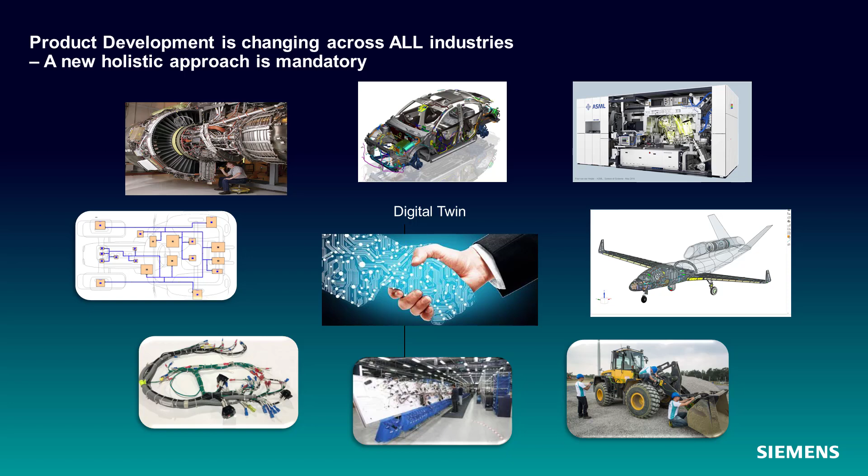So, to realize that digital twin, it's imperative that we diminish those boundaries between these different disciplines, between mechanical, electronic, electrical, network, software, simulation, all of these different environments we have. We have walls right now that impede successful productivity and innovation. So, correctly executed on, we can remove those interdependencies, we can understand the handoffs between those domains, we can establish traceability between these domains, and we can flow the data between and actually get to a product in the end that we can certify and know it did what it's supposed to do.

So the Xcelerator portfolio provides this best-in-class set of tools and methods for defining that digital twin, taking it all the way from a concept through design, through integration and manufacturing of the end product. And Capital is the suite of tools that provides the EE systems environment portion of the Xcelerator portfolio. It's integrated into the overall Xcelerator environment to provide a broad solution to our customers.

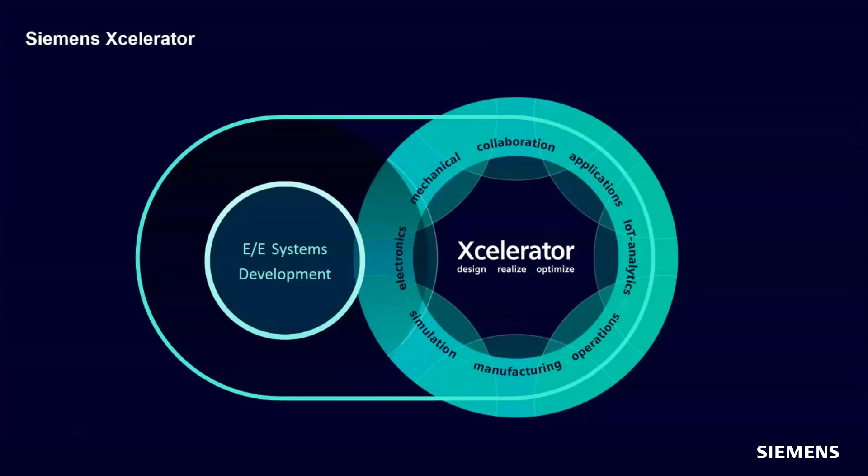And then following the entry of those products into service, customers need to be able to efficiently service, diagnose, and repair electrical systems, and Capital provides solutions that make that process more efficient than is typically possible without advanced tools.

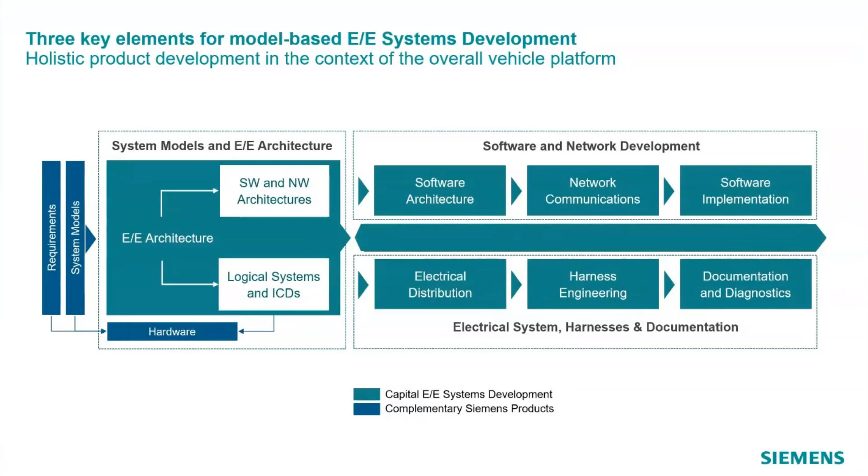So Capital itself is a data-centric system built on data and process backbones that enable extremely high levels of automation, data coherency, and integration with the adjacent domains. And this EE data management system enables traceability, change management, configuration management, and it is an environment that our customers have demanded and that we've built up over a number of years to satisfy those demands. But the EE systems are a part of the wider program lifecycle within organizations, and we do provide deep integrations into PLM systems and other necessary domains throughout the product development process.

So with that exploding complexity of the EE systems, development happens in the context of this model-based engineering. And that's what Capital is all about: model-based engineering, not just model-based systems engineering, model-based throughout the design process. So to deliver this whole integrated system, we integrate with other domains to really deliver that integrated system development environment into MCAD, PLM, and ALM systems. And in today's session, we'll take a deeper look at three of those key integrations from Capital into the overall Xcelerator solution.

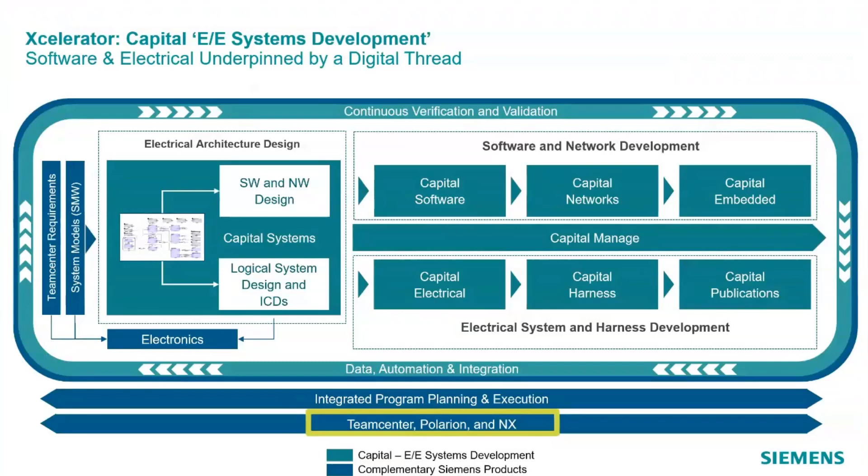So let's start with Teamcenter and how this integration enables the EE data to be integrated into the overall product structure. So EE design is just one aspect of that overall product design. In the context of the Xcelerator portfolio, it must integrate seamlessly into that overall product structure that's held in Teamcenter. And Siemens open architecture enables this integration, allows the data needed by all of those engineering disciplines to be mastered in Teamcenter, consistently used across all areas needing it, and ensures that the products designed and implemented are based on a common understanding of the requirements, the features, the variability and configuration of the larger context, as well as providing an overall status of the various pieces that make up that product.

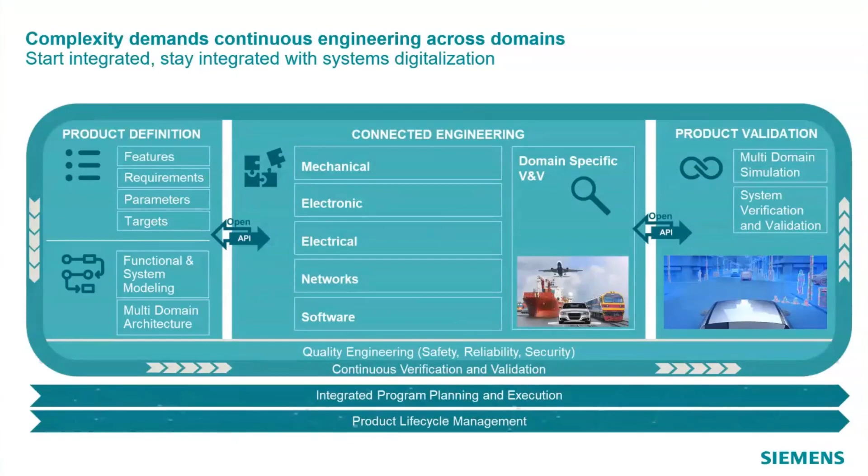So as I said before in introducing Capital, Capital itself has a rich set of data management process control capabilities, and it allows us to be deployed into customers not using other PLM systems or not connecting EE to their existing PLM. But when we're in the context of a Teamcenter environment and a customer that's using Teamcenter, Teamcenter takes control over many of those life cycle responsibilities, and Capital kind of pulls back and is used to concentrate on providing that EE design environment at which it excels.

So in such a setup, Teamcenter is responsible for the life cycle and approval process of both the components, parts used in the EE designs, as well as the designs themselves. The release and approval process is implemented via standard workflows in Teamcenter to ensure consistency with the overall product development lifecycle. And Teamcenter also holds information that's relevant to multiple design disciplines, and Capital will merely use that data to drive the EE design and ensure we have consistency across the domains.

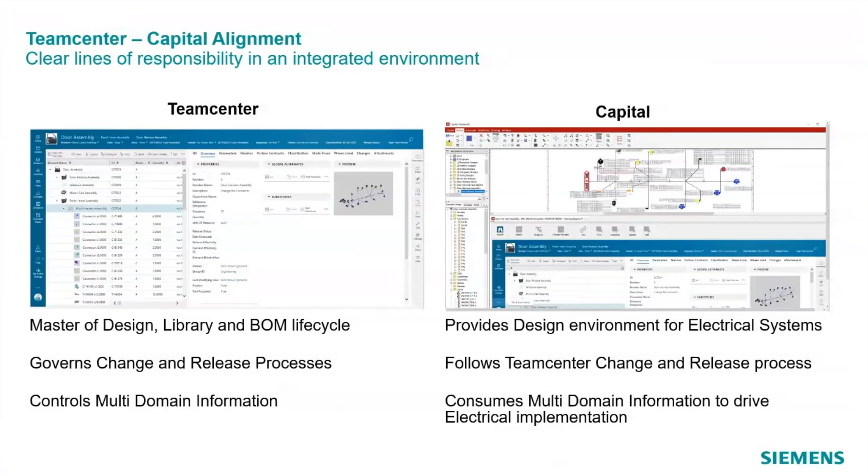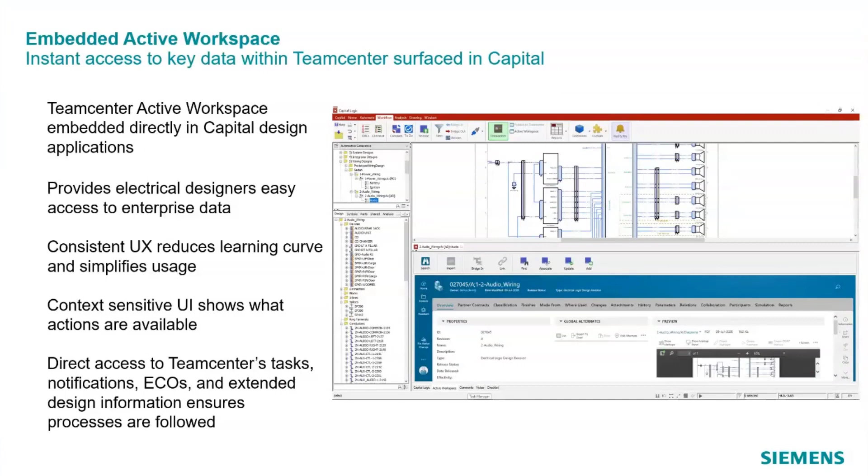So one of the key aspects of Capital's integration into Teamcenter is the use of Active Workspace embedded directly in the design applications to provide direct in-tool access to the overall product information and to the data published to Teamcenter, not just by Capital, but by other domains working on the design of the overall platform. So Capital is able to add integration and application-specific icons directly in the Active Workspace frame in order to provide context-sensitive access to the integration features. And we'll see how these are used later in the presentation to provide a seamless integration experience.

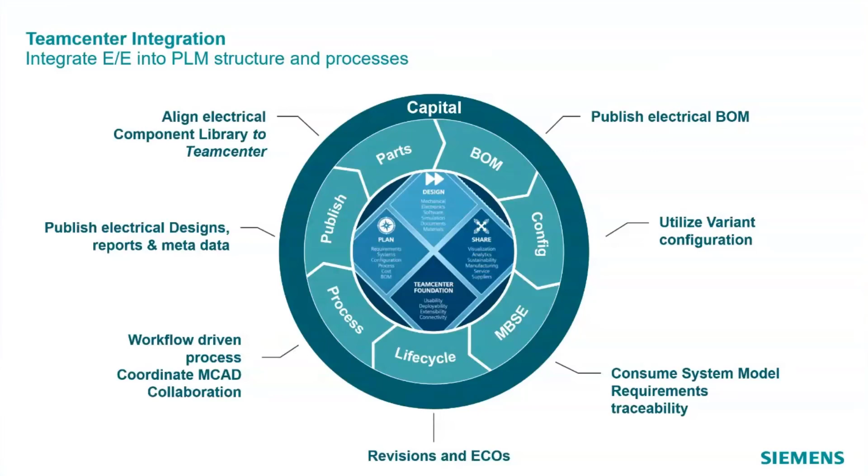So let's start at the beginning of the product development process with a definition of models representing system behavior. So in order to provide an initial electrical systems design, we have the ability to take a managed System Modeling Workbench design from Teamcenter and directly read that into Capital Systems at the front end, left side of that flow. And this really allows customers to reuse their functional or system definition from a systems model in the initial EE design. And then that initial design includes all of the relevant system elements, connections, and associations to Teamcenter requirements for the EE engineer to design their system.

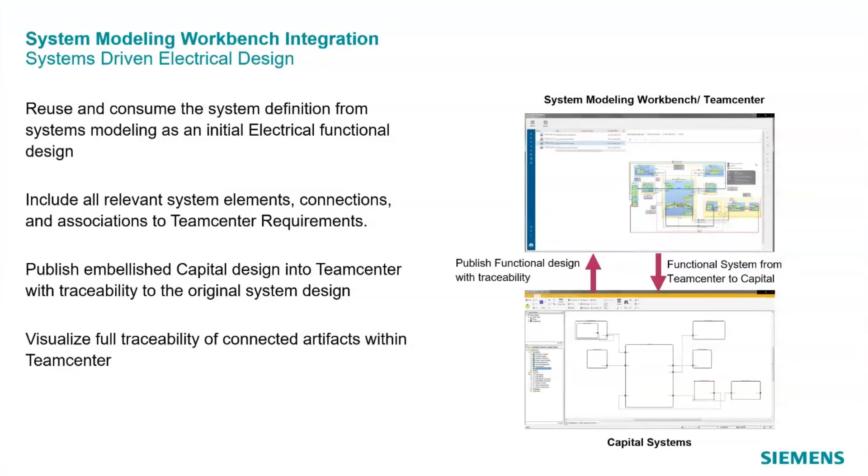And then once complete, that EE engineer can publish the refined Capital design to Teamcenter and also capture that traceability to the original system and system design. So this allows anyone in Teamcenter to visualize the full traceability of all of those connected artifacts. So System Modeling Workbench is that first integration.

And then if you move on, the next piece of this would be managing the association of the requirements in Teamcenter with the relevant objects implementing those requirements in Capital. In the case of the System Modeling Workbench, any requirements associated to the System Modeling Workbench objects are automatically carried forward and linked to the resulting objects in Capital. However, even without using the System Modeling Workbench, users in Capital are able to use the embedded Active Workspace to navigate to the relevant Teamcenter requirements and establish links between the two. And a little later, we'll take a look at what that looks like, but actually in the context of Polarion.

But from within the Teamcenter environment, even when you're not connected to Capital, a user can select the linked objects and bring up a web-based view of the Capital data and highlight exactly where those requirements are linked. So you can come through Teamcenter and understand the full breadth of the objects that are implementing those requirements. And then those associations can be used to validate that all of the requirements associated with their EE implementation have been fulfilled.

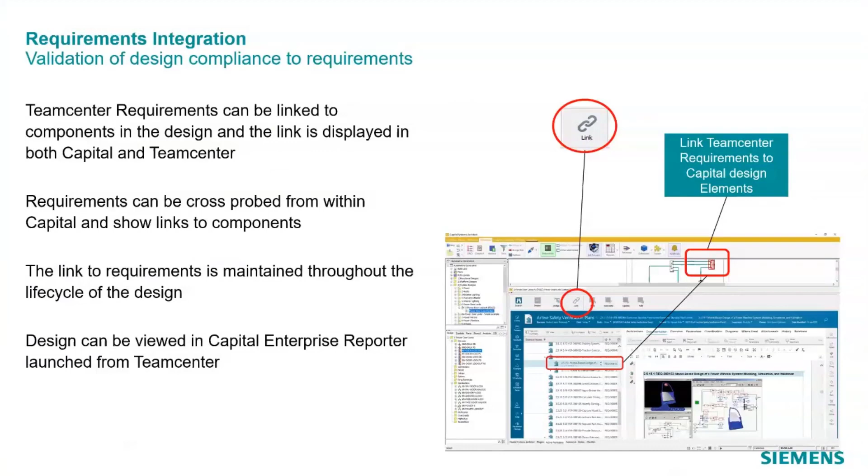Another area where Teamcenter holds the overall product information that's needed in the electrical design process is in the area of configurability. Teamcenter's Product Configurator is used to define the optional content in the platform, as well as the relationships between those options, such as inclusive or exclusive relationships. So for example, a mandatory and exclusive relationship between the engines could be available. There are multiple choices for an engine, but you can only have one, and you must have one in your car.

So the integration of Product Configurator allows these options and their relationships to be mastered in Teamcenter and used to populate the Capital version of that model into the product plan in Capital. And then that data can be used to calculate the optimal set of configurations needed to cover all the electrical and mechanical variations. And then using the powerful automation features in Capital, we arrive at an optimal set of manufacturable harness parts.

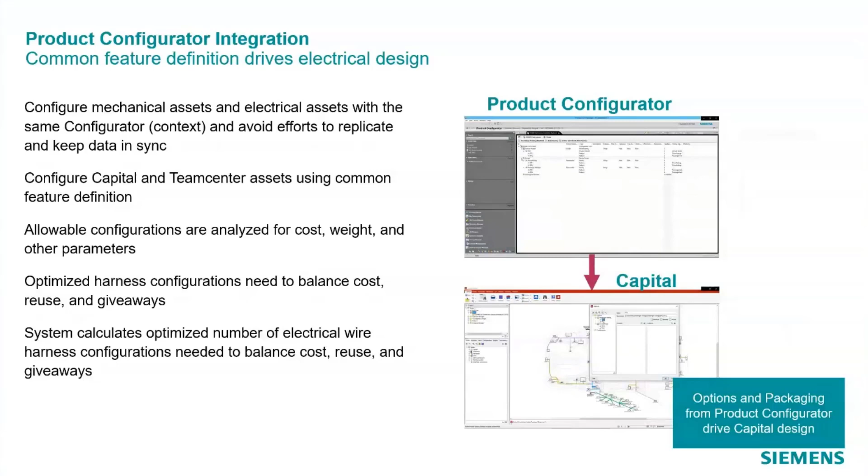So the next area of this integration that we'll highlight is component libraries. So although Capital has a robust environment for entering component data with all relevant electrical information to drive the electrical design process and automation, the identity of a component across all applications using Teamcenter, as well as the life cycle of that component, is owned by Teamcenter.

And so therefore the challenge is to ensure that Capital uses the same identity for the component as Teamcenter, so it can be correctly represented and included in the bill of materials. So to achieve this, there are both interactive and automated ways to establish that link. The interactive association and synchronization is achieved by embedding the Active Workspace into our Capital library application.

And that gives the librarians in Capital the ability to navigate to the relevant components in Teamcenter, either to initially establish the relationship or to update the Capital component attributes based on the latest data held in Teamcenter. And the use of the Active Workspace here also allows those Capital librarians to see all other aspects of that part held in Teamcenter, not just the electrical aspects of it.

But to ensure those libraries are always in sync without manual intervention, the EDA library capability in Teamcenter is used to extract the updated components and automatically send them to Capital. And so the schedule for that integration is defined on the Capital side using our Capital Enterprise Assets application, and it initiates the pull of the latest component information from Teamcenter and manages the merging of that data into the Capital library itself.

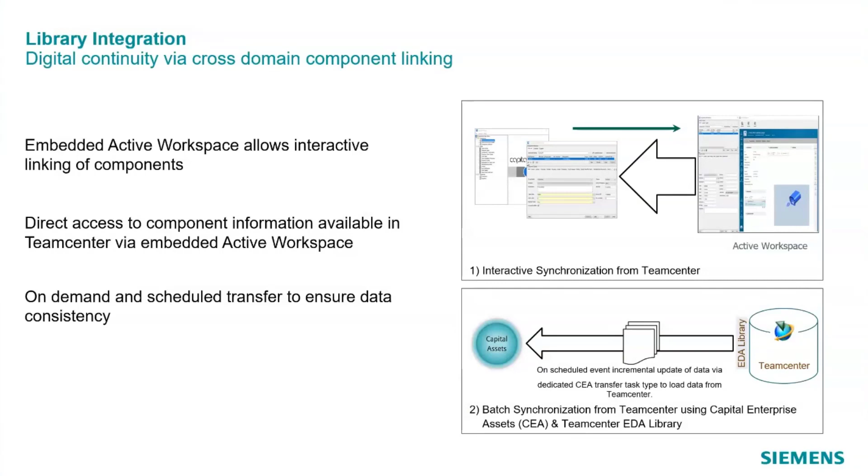So with those links established to the component library and the Capital data model populated with the relevant cross-domain information, electrical designers can use the powerful automation and electrical design features in Capital to complete the designs and publish those results back into Teamcenter. And there are a set of standard item and dataset types for electrical that are shipped with Teamcenter that customers can quickly configure.

The default configuration in Capital uses those item and dataset types when we publish to Teamcenter. And this is what we use for Teamcenter X deployment: out-of-the-box dataset types defined in Teamcenter. Out of the box, Capital ships with those same data types. So for a new customer, it's all good. However, many customers already have these item types and dataset types defined and in use. So we provide the ability to configure the integration to publish to any design type in Teamcenter as required. And that configurability is key to enabling the Capital integration into any new or existing customer setup.

So by default, Capital will publish a zip file of design XML representing the design for archival purposes, as well as a graphical representation, PDF by default. Others are supported. However, customers can configure that integration to publish any report available within Capital, as well as having full plug-in capabilities to allow any type of data to be published along with the design itself.

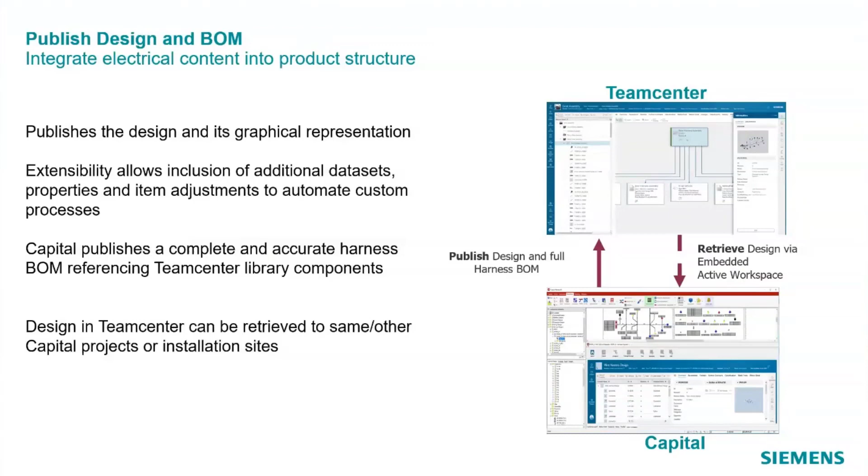So now let's move on and talk about the life cycle of Capital designs and how they can be controlled via what we call the Teamcenter driven design process. So in this flow, the creation and revisioning of electrical designs is initiated from Teamcenter to establish the existence and identity of an electrical design.

So from within the embedded Active Workspace in a Capital design application, the engineer can navigate to an item in Teamcenter and create the Capital design that will implement that item and the required electrical connectivity, and eventually then publish the results of that design activity back to Teamcenter, as we talked about in the previous slide. So this context-sensitive integration is achieved with additional Capital capabilities added to the embedded Active Workspace.

And this allows users to create new designs in Capital from existing Teamcenter items, or associate an existing Capital design to an existing Teamcenter item. And then after that association is made, push any attribute changes from Teamcenter back onto the Capital design. So this is a process favored by many of our customers to ensure that their electrical designs are fully integrated into that overall product and really drive everything from Teamcenter.

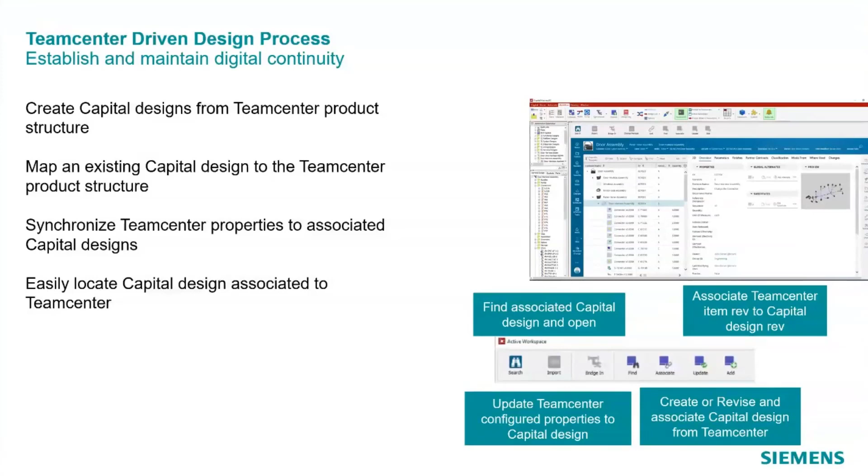Carrying on with the theme of Teamcenter managing the life cycle of Capital designs, the integration also supports the use of workflows in Teamcenter. Currently there are two types of electrical workflows available, shipped directly with Teamcenter. The electrical design review workflow allows a Teamcenter user to progress a Capital design through an approval process, ensuring the design in Capital follows the Teamcenter states to keep the release level in sync with changes made in Teamcenter. That workflow also supports rejecting the approval and moving the design back to in-work status so issues can be fixed, then republished and resubmitted.

The second workflow is the electrical design revise workflow, usually used for change management. It allows a Teamcenter user to create a revision of the capital design ready for either new functionality or a defect fix. The capital user simply opens the target revision after the workflow is completed and starts work. But to enforce process, Capital has the ability to set a preference that forces all design creation and revisioning to be driven through Teamcenter.

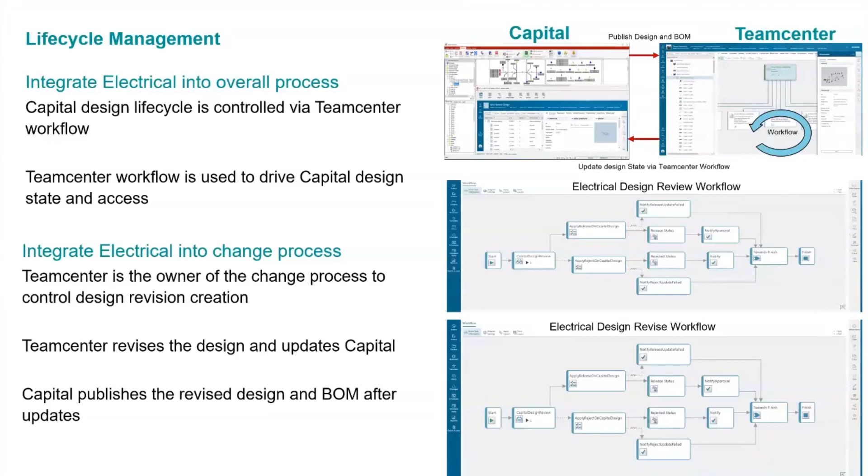As a final piece of the Capital-Teamcenter integration, Teamcenter can be used to mediate the exchange of data between Capital and NX. Instead of using uncontrolled methods of file exchange like the operating system or email, the data can go directly into Teamcenter, where either application can access it in a configuration-controlled way, ensuring the right files are used from the right revisions on both sides. So when Capital is connected to Teamcenter and data is bridged out, it'll automatically be placed into Teamcenter instead of the file system, under the item we're publishing.

And in the embedded active workspace, you can navigate and bring data from NX directly back into Capital. So hopefully you've seen here how the Capital integration with Teamcenter has many touch points to enable that digital thread to be created, maintained, and leveraged to integrate the electrical data into the overall product structure.

At this point, I'd like to hand the presentation over to Tanya, and she'll take us through the NX related integrations.

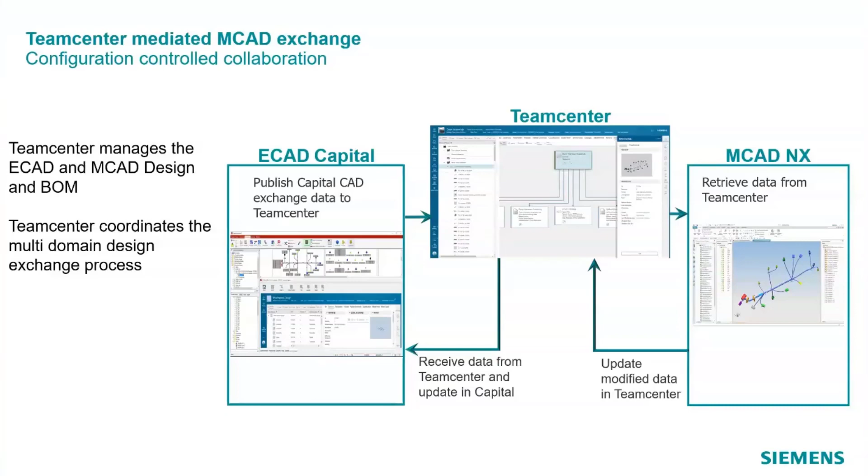Thank you, Glenn. Moving on now to the topic of integrating electrical and mechanical design processes. Let's discuss how NX Capital integration strengthens the Xcelerator offering around electrical design. Just as there are benefits to integrating electrical data into Teamcenter, there are also benefits to breaking down the silos between mechanical and electrical design. As shown in the results of an engineering.com research report, 72% of teams say an integrated electrical and mechanical design environment can significantly reduce product delivery time.

Why is that? In many companies today, electrical and mechanical design teams work separately, and therefore the integration is done late in the design process. This results in either rework to the physical structure of the platform, which can be very costly, or more likely a suboptimal integration of the wiring, resulting in some electrical characteristics not being accounted for in the initial design. In either case, there is an impact to schedule and quality. So it is essential to

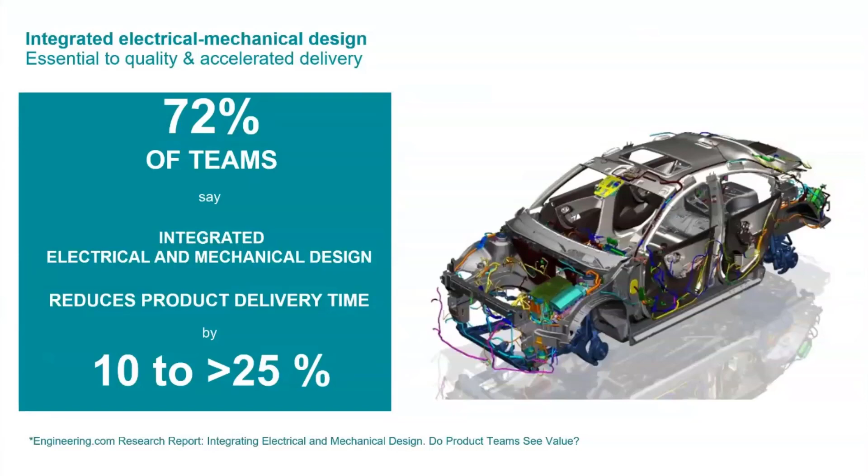obtain seamless integration, enabling ECAD-MCAD co-design across the Xcelerator portfolio. In most design flows, engineers are typically working concurrently on designing the physical harnesses in NX, while electrical connectivity is being defined and designed within Capital. So NX is responsible for defining the physical geometry of the harness, the fixtures and fittings, and ensuring there is sufficient space in the vehicle for the harness to be routed and fitted. Whereas Capital is responsible for mastering the electrical connectivity and fully defining the harness as an electromechanical product. The NX and Capital electrical data are then combined to make manufacturable harnesses, so the collaboration between these two tools is key to enabling precise concurrent design.

Capital Tools has many touch points with NX across all domains, like Capital Logic, Topology and Integrator, and Harness XC or Modular XC. Capital provides a robust and flexible set of integration capabilities to enable the digital thread to be created, maintained, and leveraged to integrate electrical data. With Capital Logic, we have the ability to send wires to NX and have them routed and wired back. In the topological tools, we can import the bundle topology and have routed or synthesized wiring, then calculate bundle diameters and splice positions and return them back to NX.

Finally, with Capital Harness XC and Modular XC, we can pull the full mechanical description of the harness parts, including bundle protections and supports, and have the wiring synchronized, then calculate bundle diameters and splice positions and return them back to NX. This process also eliminates the need to have any wiring in the MCAD tool, if desired. This separation of data means an NX harness won't need to be modified and rechecked whenever low-level electrical changes happen, which reduces the overall number of design change approvals needed to implement a change and improves the overall design time.

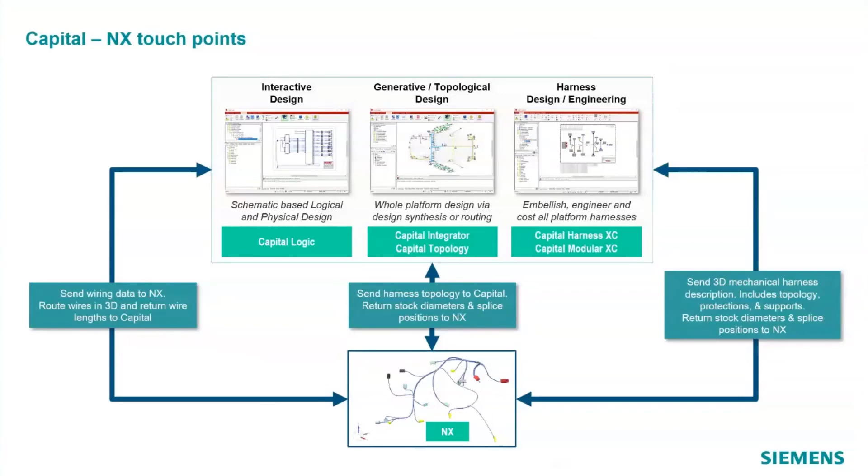All these integration capabilities are enabled via a combination of our bridges framework and adapters, which handle the exchange of information between NX and Capital. On the left, we have a set of plugins using MCAD application APIs, deployed within the MCAD tools. We have the bridges framework with its adapters that understand what comes out of the MCAD products, and then our patented flattener that transforms the 3D representation from the MCAD product to the 2D representation we require.

Finally, we have change manager, which understands the difference between received data and what's already in the design. So the goal of these integrations is to ensure that key data shared between electrical and mechanical designers is aligned early in the design process and stays aligned as development continues.

To address this, electrical and mechanical designers need to exchange data as early as possible and then iterate, as there will be outside forces driving change in both areas. So change management is a fundamental backbone to these ECAD-MCAD integrations. We'll look at it in more detail in later slides.

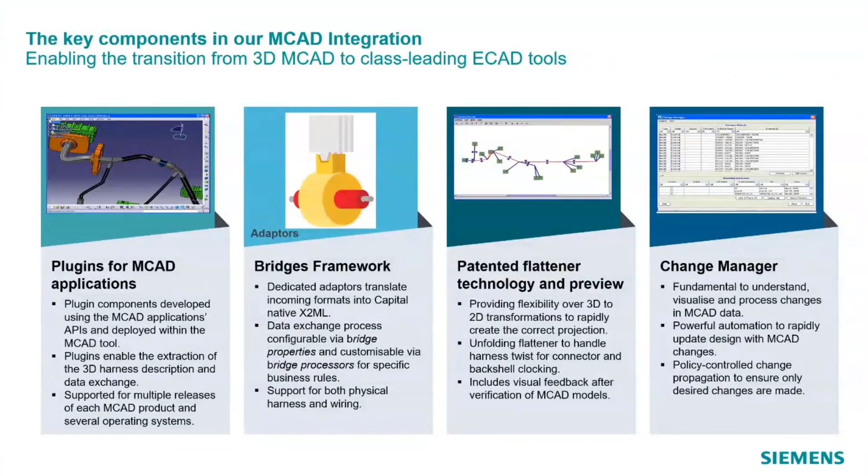The extended wiring and harness data integration is supported between Capital and NX now, enabling world-class integrations with NX compared to integration with non-Siemens MCAD tools.

This extended integration enables CAD zip file exchange, the format being PLM XML and a JSON file contained in a zip. By adding the JSON file to the data exchange process, we're able to integrate new capabilities like unfolding flattener, connector and backshell clocking, and NX-specified 3D flattening plane. During bridge out, this format enables NX stock diameter updates and automatic splice positioning.

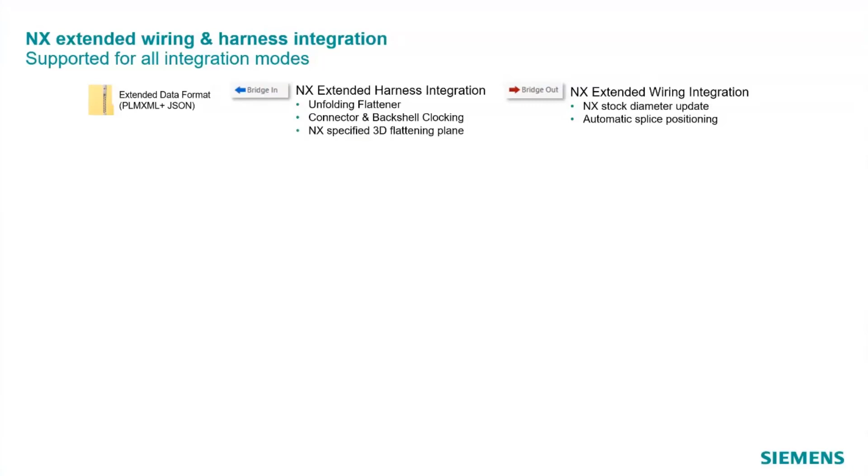So there are multiple ways to accomplish the integration depending on organizational requirements. We have file-based mode, connect mode, direct Capital Navigator mode, and Teamcenter mediated MCAD collaboration mode.

In connect mode, we can directly connect the electrical application to NX to exchange data and understand the electrical routing in the physical context by cross-selecting between the two tools.

In Capital Navigator mode, the user is able to access Capital data right within NX without having access to a separate Capital installation. Another method of integration is to use Teamcenter to hold the files to be exchanged, with the embedded active workspace in the Capital application to navigate to the desired version.

This provides a structured file-based exchange, as opposed to a pure file-based exchange where there is no guarantee on the source or the version of the file being imported.

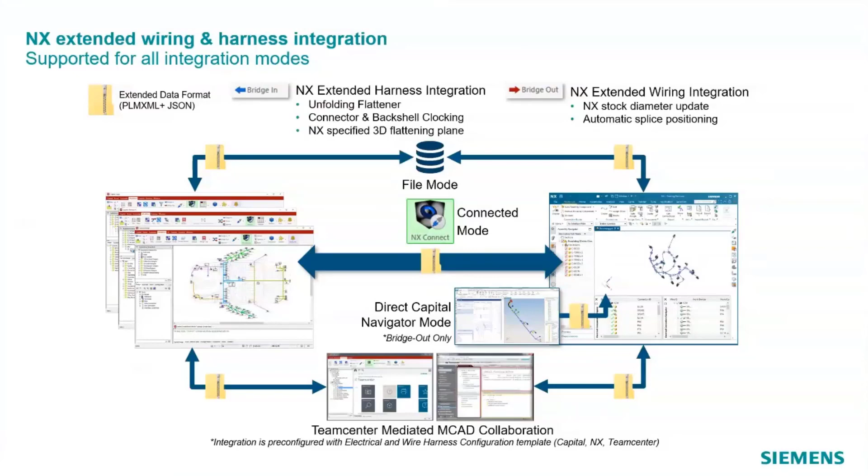Moving on, let's see how the Siemens Xcelerator portfolio aids in the ECAD-MCAD co-design process. This is the first use case in the NX Capital integration flow. The basic idea here is that Capital is the master of electrical content and NX takes care of 3D harness models.

The ECAD designer begins by creating the wiring and connectivity layout in Capital. This layout includes key components such as wires, connectors, multicores, and splices. The designer then exports this wiring data to the mechanical engineer, who imports this data, and NX automatically links the electrical data to the 3D objects.

Then we can route the wiring through the platform, enabling bundling diameter calculations to take place. When ready, a file containing these incremental changes is exported for review by the ECAD designer.

The ECAD designer then imports this data and performs a number of checks on the design. The designer can use the 3D wire length from NX to perform voltage drop calculations and ensure that enough space has been reserved in the mechanical design to fit the wiring bundle.

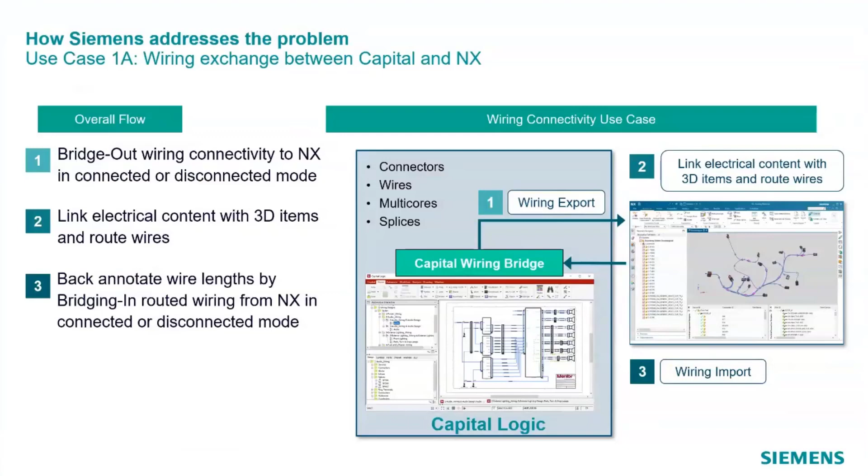Changes can be made as needed, and a new incremental file can be sent back to the mechanical engineer. This flow can be achieved either by connect mode or file-based mode.

This wiring exchange use case that we've just seen can also be achieved by direct Capital Navigator integration. This mode allows the MCAD user to access ECAD information without having access to the Capital application.

In the previous integration scenarios we looked at, the integration was achieved either in disconnected or connected mode. The disconnected mode relies on the exchange of an intermediate file to bring Capital data into the MCAD application, while the connected mode doesn't require an intermediate file but still requires access to a running application. In both cases, the MCAD user has to switch between NX and Capital to exchange data.

Now within Capital Navigator, the user is able to access Capital data right from within NX, removing the need to have access to a Capital installation or even knowledge of using the Capital tool. This is key to enabling collaboration and co-design between ECAD and MCAD domains, and strengthens the digital continuity through the product design phases.

The steps in this flow are: first, wiring data is read from Capital by selecting the appropriate harness filter, and then connectors are assigned in NX and wires are automatically routed.

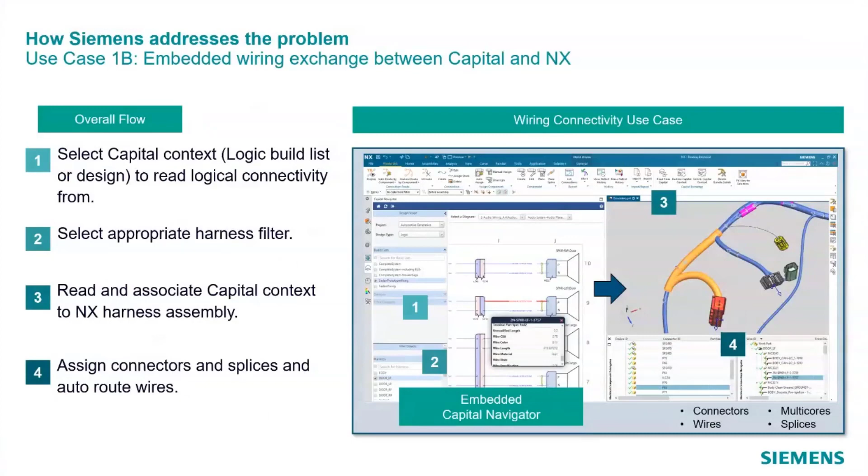The next use case is harness exchange between Capital and NX. Harness description from NX, including bundles, supports, and protections, are imported into HarnessXC via Change Manager, which is used to control the incoming data. Then the harness is flattened as desired and processed into harness design.

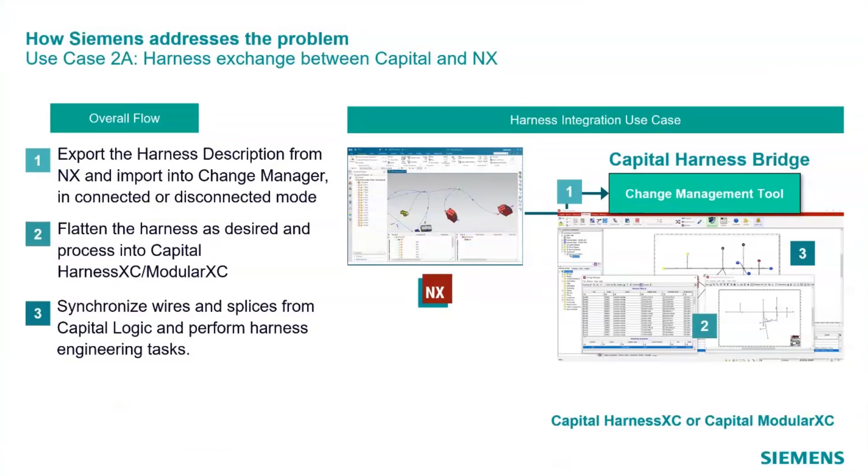Wires are not present in this harness design because of change policy settings. So the harness is synchronized with Capital wiring design to get wiring information, and then bundle diameters are calculated using the synchronized wiring, and splice optimization can be done. These new bundle diameters and updated splice positions are exported back to NX.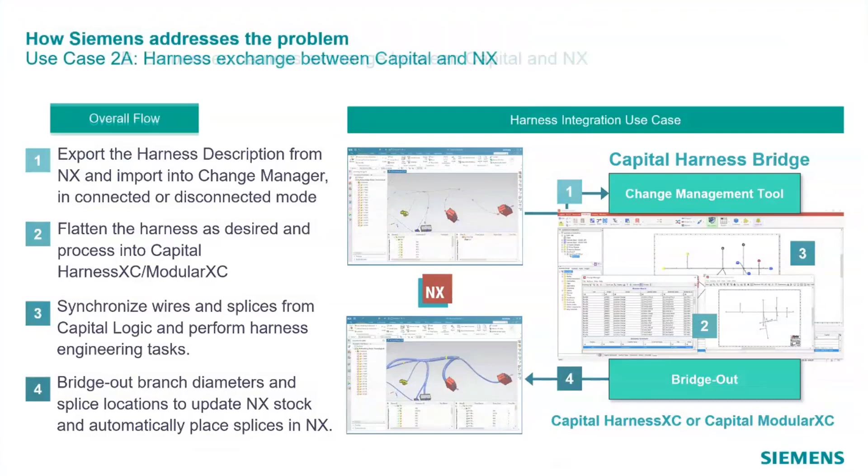In the same way as before, the bundle diameters and splice positions in NX can also be updated by NX Designer using embedded Capital Navigator.

In many companies, NX has been used as the container for electrical data, even though it is not an electrical design tool. This can cause excessive design sizes as the wiring connection data has to be fully implemented and saved in the NX model. In some cases, this leads companies to split the harness across zones to manage the data sizes.

To address this issue, we have introduced the ability for NX to contain only the harness structure and connectors, and to visualize the wires defined in the electrical model in the context of the NX harness. This allows NX users to see wire routes and evaluate splice locations in the context of the 3D model to ensure they correctly integrate.

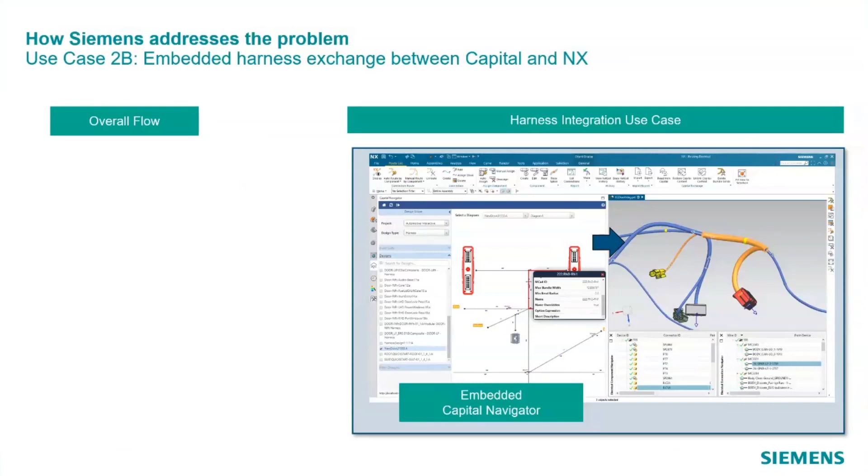In addition, to facilitate clearance checks and other analysis, the bundle diameters calculated in the electrical data can be applied to the NX model so that accurate bundle diameters are shown. This flow is also possible in connect mode or file-based mode.

As you see here, after all the harness engineering tasks are done within Capital, the MCAD engineer can get the latest design data within the NX application. The user can apply Capital context to his NX electrical assembly, enabling automatic splice creation and positioning, and bundle diameter updates in NX based on wiring content.

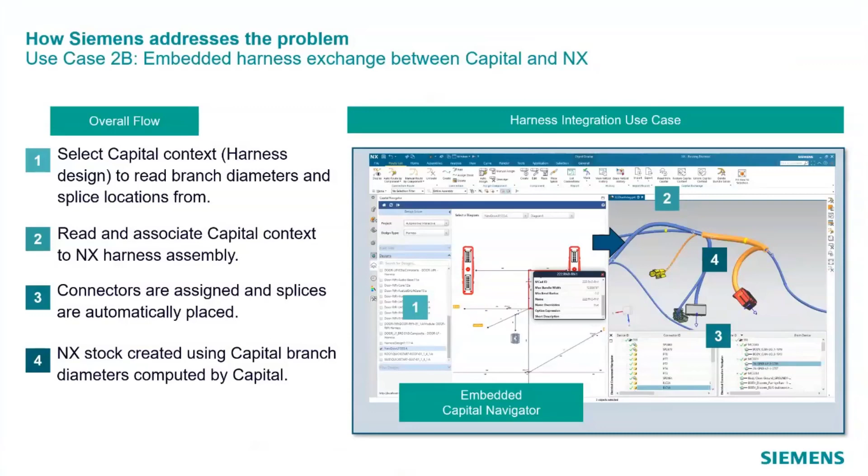A key element in realizing these integration capabilities across multiple domains is powerful change management. Clear ownership of various types of data must be established and can then be captured in digital form to define the rules of exchange. With these rules in place, a designer in Capital can proceed with adding detail to a model whose physical structure is defined in MCAD, without fear of that work being lost at any integration point.

Bridging in of design data into Harness XC or Integrator is enabled through the Change Manager, which is a preview, validation, and change control interface that allows linking harness objects with externally sourced entities, as well as synchronization of changes in shared data subject to a change policy if required.

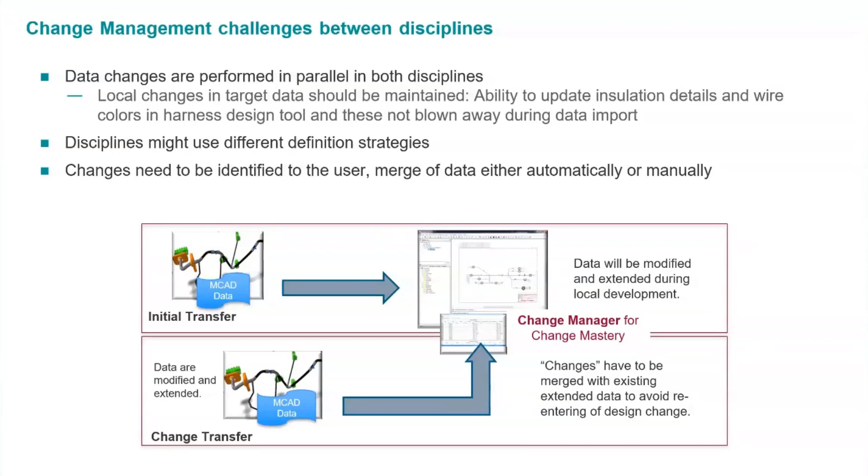The Change Manager facility enables you to link bundles from your Capital design with their corresponding bundles from the external source. When you link a bundle from an NX design with a bundle from the existing Capital design, the properties for which the master source is the Capital application remain on the object in Capital, and the object properties for which the master source is the external application, for example length, will be overwritten by the value from the external harness data.

Change policies allow you to control the way in which changes are propagated during harness synchronization and bridging processes. They can also regulate which objects are permitted or prohibited from being created, updated, or deleted. For example, when bridging in NX topology data and we do not want to get wires from NX, we can create a change policy to not create, update, or delete wires. When this change policy is used during import, wires will not be updated based on the incoming data.

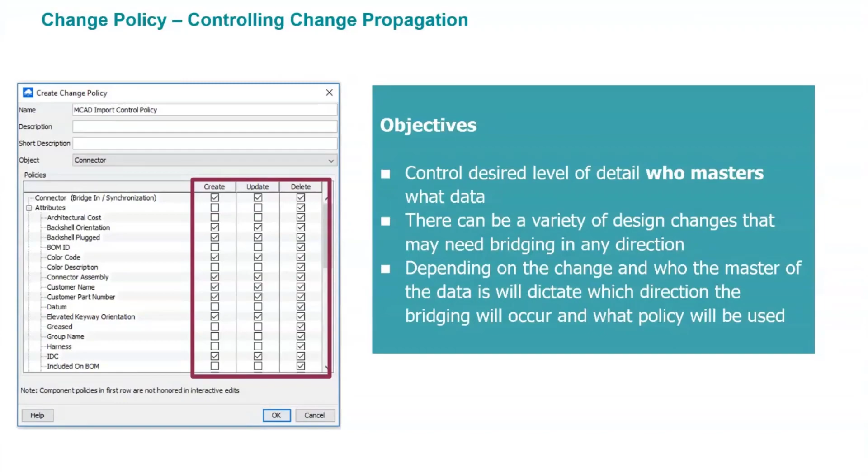Here is an example that demonstrates how powerful Capital's Change Manager is in handling data changes. We begin by adding an insulation to an existing bundle in Harness XC, and then we change the bundle structure in NX. The goal is to propagate the change in bundle structure to Harness XC without deleting the insulation that was added in XC.

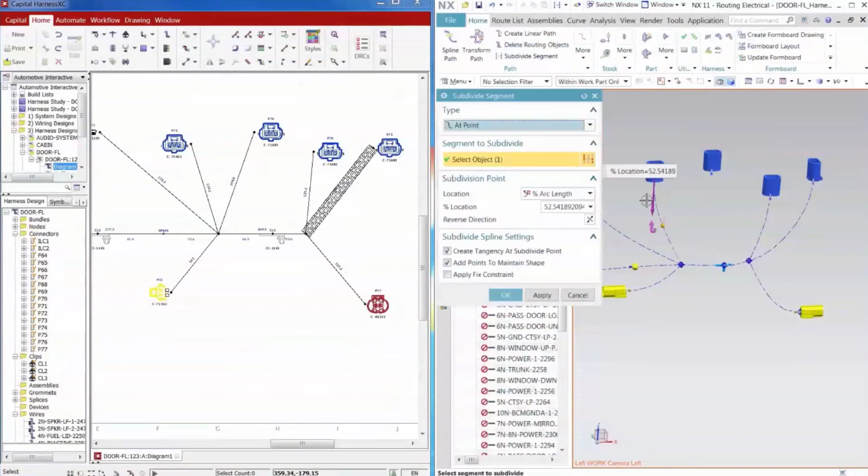Now we are changing the bundle topology within NX. The wires are automatically routed. In Change Manager, you can flatten the harness as desired, and it also shows a preview of incoming data and all the changes that will happen if the external data is processed.

When we import the new, modified data from NX, you see the change in bundle topology in the preview window, but not yet within the Harness XC design. We then have a change policy to not create, update, or delete any insulations based on incoming data, and this change policy is used during import.

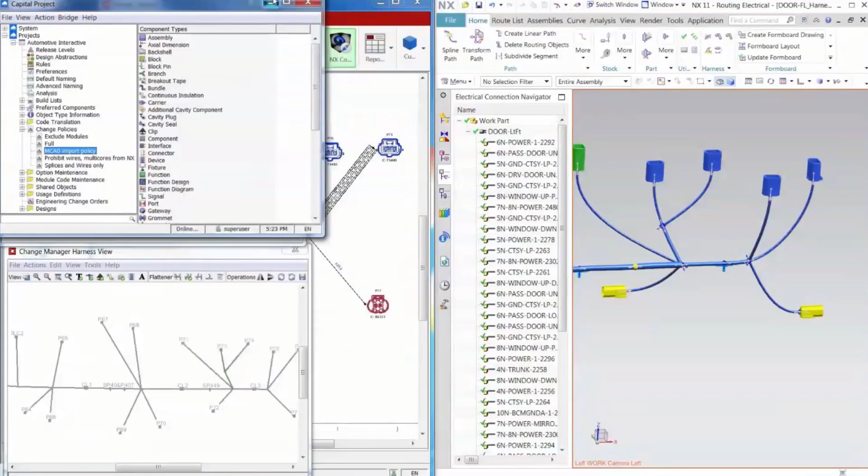Once the harness is processed, you'll see that the topology change is reflected in XC, but the insulation data is retained.

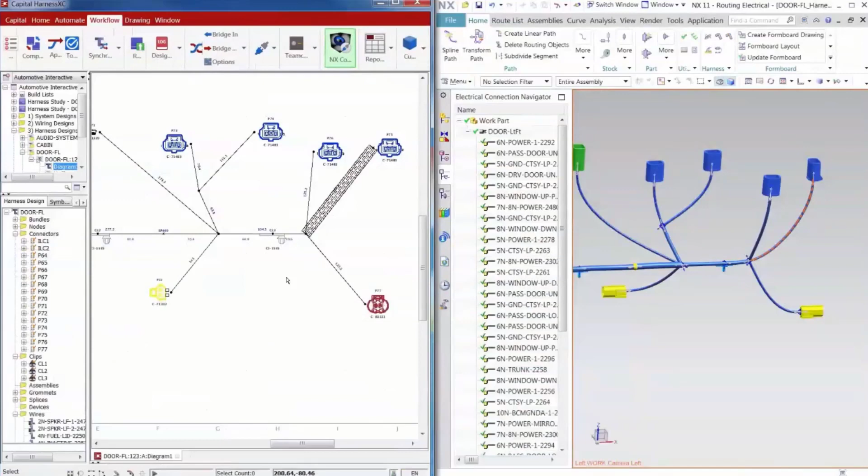And as seen in the previous video, we have various ways of flattening the incoming 3D harness topology. Orthogonal flattening is the standard style of harness diagram for engineering. It projects 3D coordinates of a harness model onto a 2D plane while laying out the branches perpendicular to each other. And then we have 3D flattening that keeps the 3D representation of the harness as close as possible to the original 3D layout. This closely matches the NX harness shape and is many times used in the topology or integrated plane to retain a realistic representation of the harness.

And we have the unfolding flattener that straightens all bundles while recording the rotational displacements used during the flattening. This allows the clocking of connector keyways and of backshells to be preserved. Backshell and connector clocking angles are needed to achieve the desired installation shape and can only be defined by MCAD. So representation of these angles on harness drawings is crucial for harness fabrication.

We now have NX extended integrations to support connector and backshell clocking. In 2D harness drawings, the clocking angles are computed with respect to the flattening plane and visualized on the connector using styling capabilities. The clocking computation is done with either unfolding flattening or orthogonal flattening methods. When orthogonal flattening is used, the harness is still unfolded using the unfolding algorithm to track clocking angles, but then laid out using the orthogonal pattern.

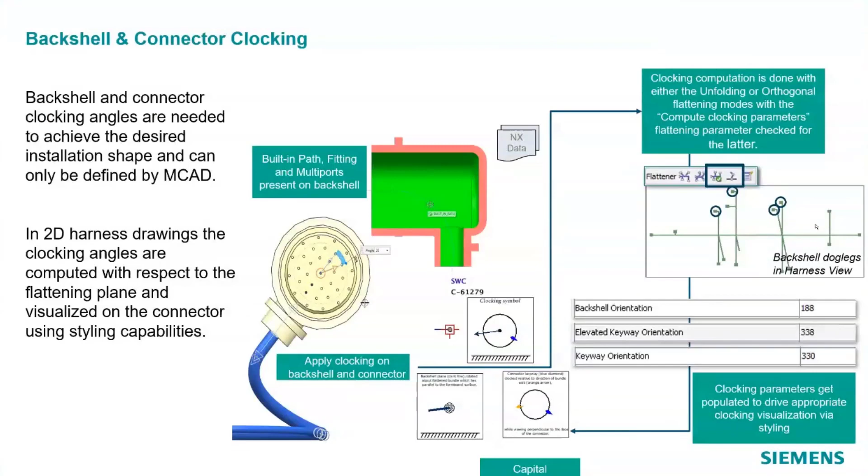Finally, I'd like to highlight the importance of ECAD-MCAD collaboration. It enables co-design across multiple domains and is a driving factor to achieve productivity and design quality. This role is seen as key for industries facing a rapidly evolving future. Blurring boundaries across engineering, manufacturing, and service is crucial to improve quality, accelerate product development, and optimize the process over the life cycle. Thank you.

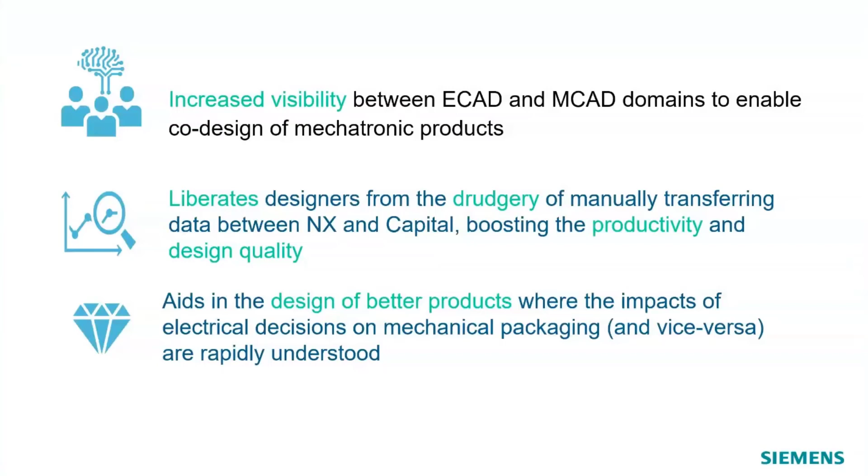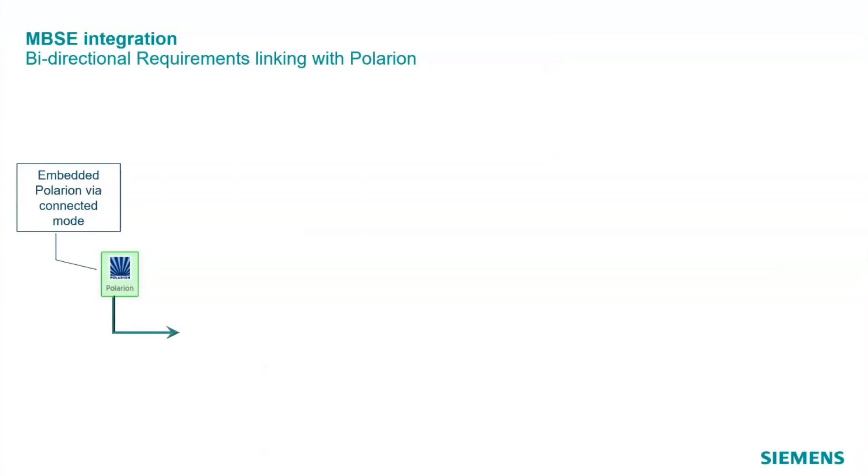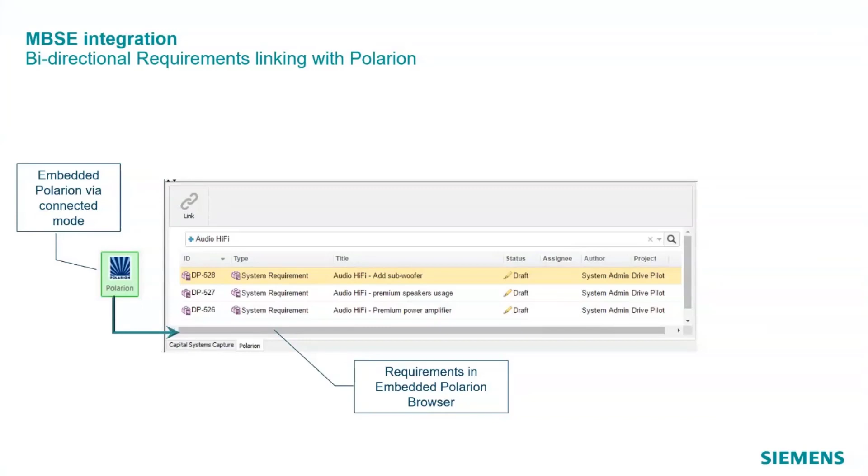All right, thanks, Chaitanya. Let's wrap this up with Capital integrations into Polarion for requirements management. Similar to the Teamcenter integration using the embedded Active Workspace, the Polarion browser is embedded directly into our design tools and provides an integrated experience for the designers, allowing the user to browse for requirements or work items. And then from a Polarion work item revision, the integration automatically enables the linking capability.

So the link action requires a Capital design to be opened, and then on invocation, Capital provides an environment where the user can manage and select the Capital objects that are the targets where that work item link needs to be created. So what item in Capital is implementing that requirement? And the link action is available for all work item types which are configured in the Polarion properties. We've talked about requirements management here, but actually any type of work item can be configured to be linked.

The user just selects the objects in the Capital design for that association and then proceeds with the link creation in Capital. And then in the Capital links tab in the browser, it lists out all of the established links and enables you to visualize the Capital design with hyperlinks and filtering capability. So that link tab also provides the actions to manage and update those links.

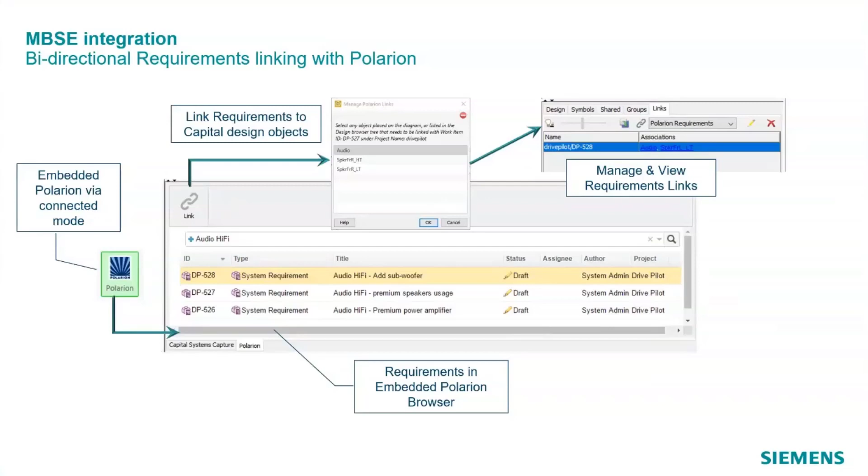So the view requirement action will automatically open an external Polarion browser, locate and open the selected requirement revision, and then in the hyperlink section of Polarion, you can inspect on the Polarion side the bidirectional storage and linking to the Capital objects. But during development activity in Capital, there might be the need to change the associations to the design objects that are implementing that requirement. So the edit association action also allows you to adjust and reassign the design objects and then automatically update the requirement on the Polarion side.

And then Capital commands like export, import, revise of a design will create new design revisions, and the requirement links can be taken forward into those new designs in Capital. And the reconcile requirements action ensures that the links available in the Capital design are reflected on the Polarion side to ensure correct bidirectional linking. Removal of requirements on the Capital side will also automatically update the Polarion requirement and reflect that change.

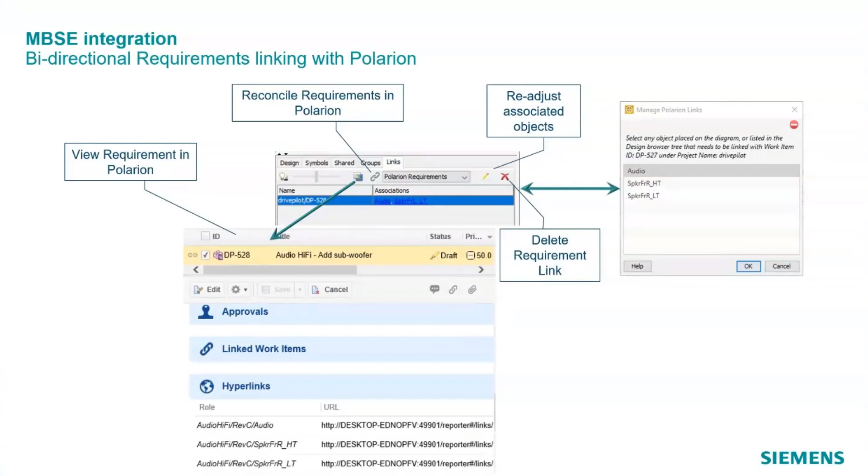So that bidirectional linking enables the Polarion user completely outside of a Capital environment to view the associated Capital object. So on the stored relation in Polarion, the available hyperlink will automatically view the data using our Capital Enterprise Reporter application, web-based application reporting.

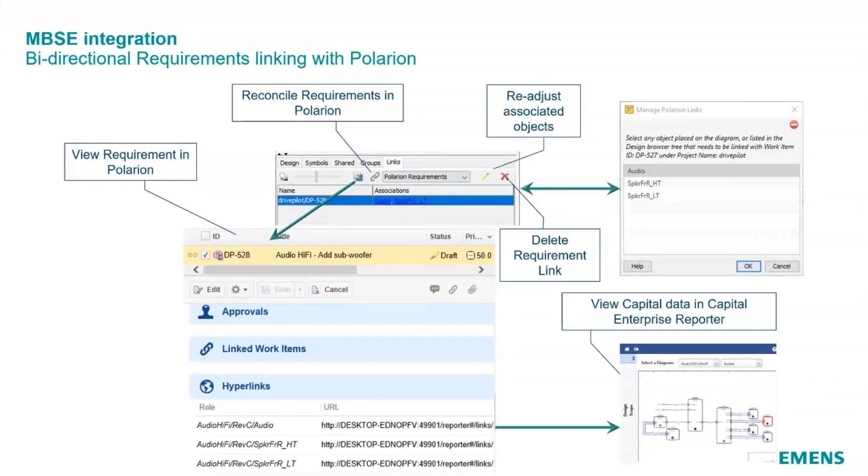All right, so those are the three key integrations, and I'd just like to recap here on the items we covered. Capital itself has very rich electrical data management and is a model-based design environment, and enables that digital thread. The integration into Teamcenter really allows the EE to participate in that overall product structure, and then those integrations with NX break down the silos between electrical and mechanical designs and really achieve this integrated design process.

So I think taken together, these capabilities really enable our customers' ability to realize a model-based enterprise, not just model-based systems engineering, but model-based engineering across the enterprise, and to implement that digital twin. And that really is what makes Xcelerator the leading solution in the market.